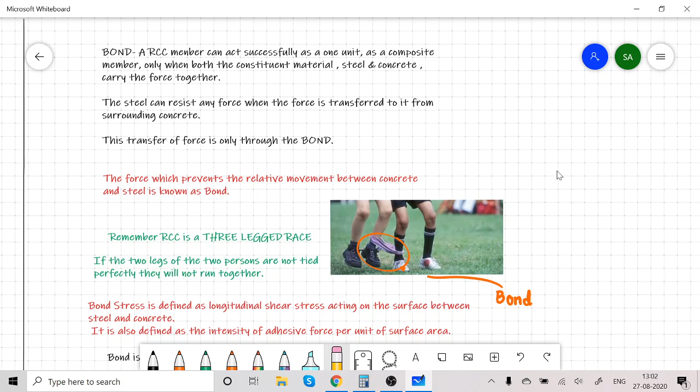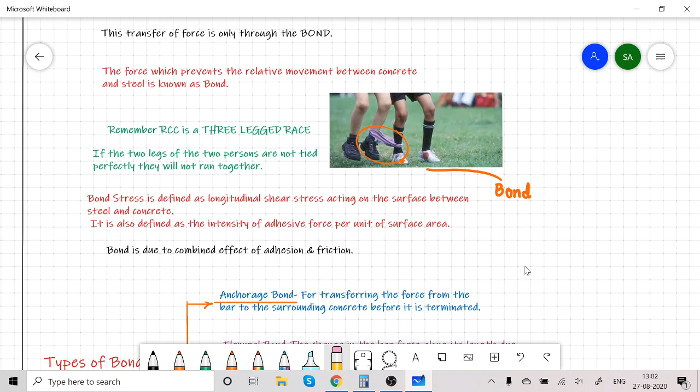Bond stress is defined as a longitudinal shear stress acting on the surface between steel and concrete. Bond stress is also defined as the intensity of adhesive force per unit of surface area. Bond is due to combined effect of adhesion and friction.

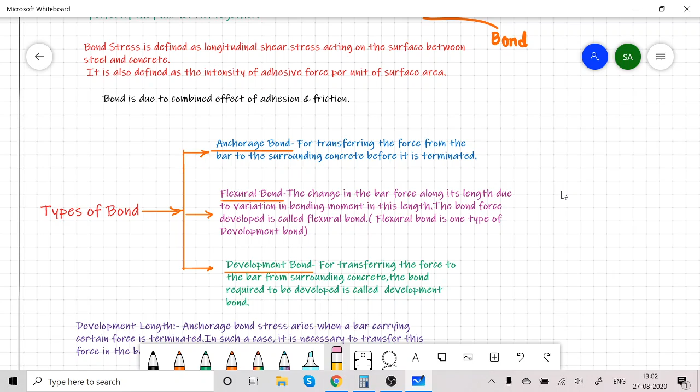Now there are three different types of bond. Anchorage bond is for transferring the force from the bar to the surrounding concrete before it is terminated, that is anchorage bond. Then flexural bond: the change in the bar force along its length due to variation in bending moment in this length, the bond force developed is called flexural bond.

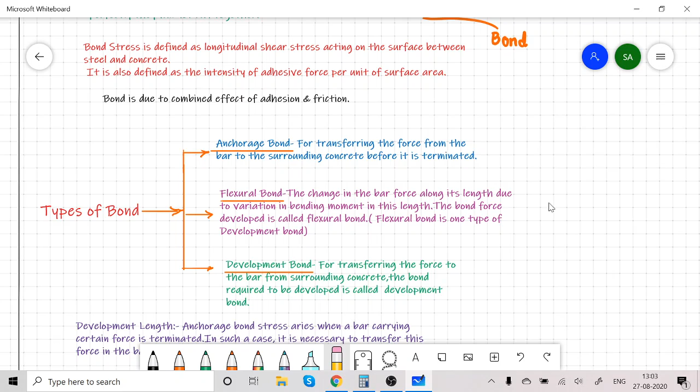Flexural bond is one type of development bond. And the third type is development bond. For transferring the force to the bar from surrounding concrete, the bond required to be developed is called development bond.

Now let us see what is development length. Anchorage bond stress arises when a bar carrying certain force is terminated. In such a case, it is necessary to transfer this force in the bar to the surrounding concrete over a certain length. The length of the bar LD required to transfer the force in the bar to the surrounding concrete through bond is called anchorage length.

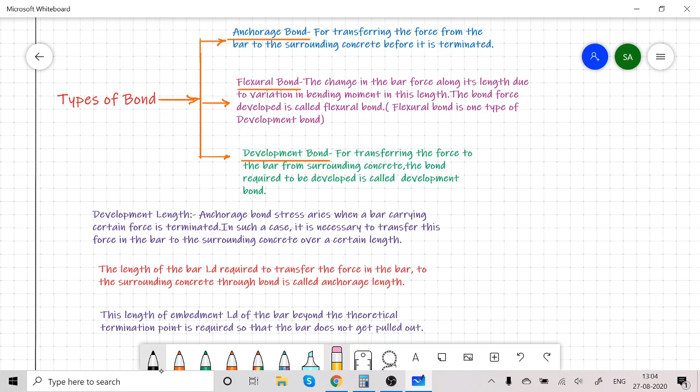The length of embedment LD of the bar beyond the theoretical termination point is required so that the bar does not get pulled out. For example, consider a cantilever beam

or a cantilever slab. This is a cantilever slab, and to resist tension, as there is a hogging bending moment, tension will be at the top. So main steel is provided at the top.

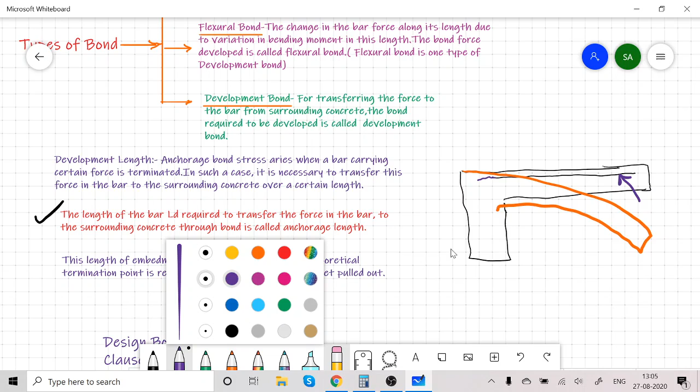Now if you provide the bar up to this point only, what will happen? There is a possibility of the bar getting pulled out due to this hogging bending moment. This bar will get pulled out, and to avoid this, one should embed this top bar, which is under tension, to a sufficient length so that it will not get pulled out.

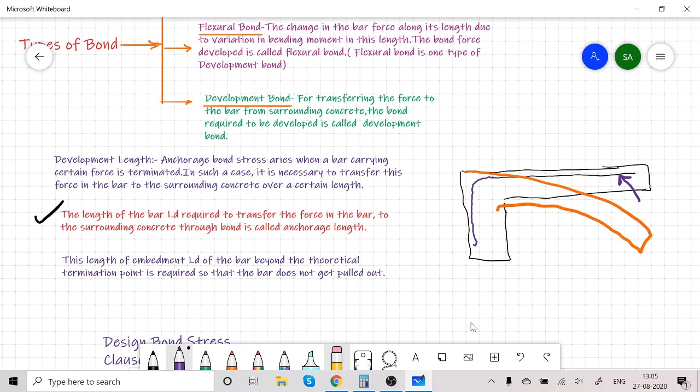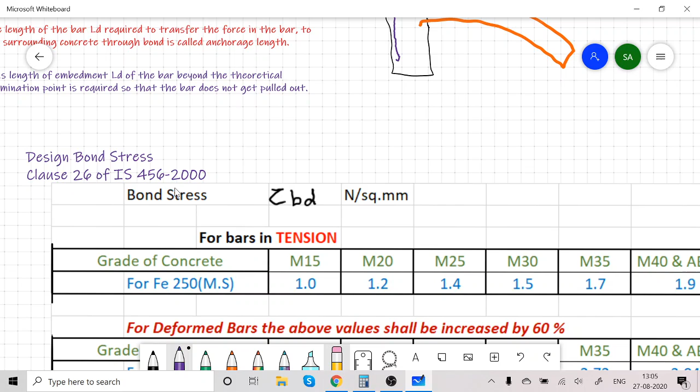So how the development length is calculated, we will see here. Before that, the bond stress depends upon grade of concrete. The design bond stress is given in clause 26 of IS 456/2000. It is denoted by tau BD, design bond stress, measured in Newton per square millimeter.

For bars under tension, for grade of concrete, this table is for Fe 250, that is mild steel. M15, M20, M25, M30, M35, M40 and above, and corresponding tau BD values are given in Newton per square millimeter.

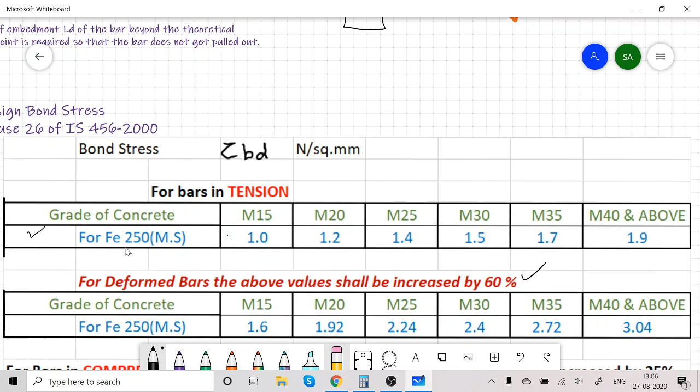Remember, this is for mild steel. For deformed bars, that is for torch steel, Fe415 or Fe500, these values given in this table are to be increased by 60%. So after increasing these values by 60%, these values are for torch steel, deformed bars.

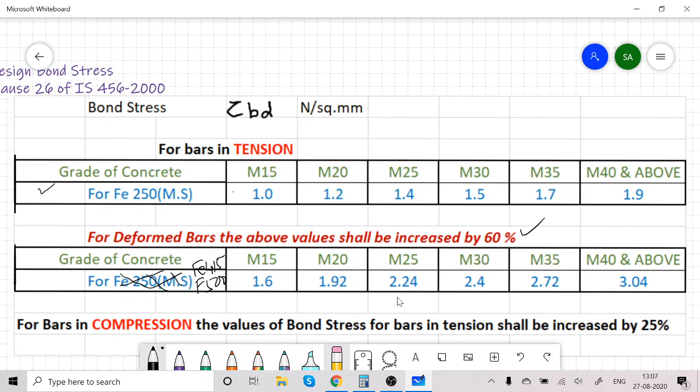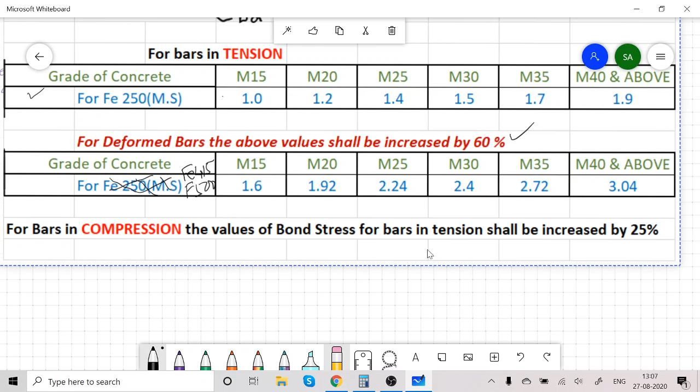Now, if the bars are under compression, the values of bond stress in the bar shall be increased by 25%. So, if the bar is in compression, the value of bond stress is increased by 25%.

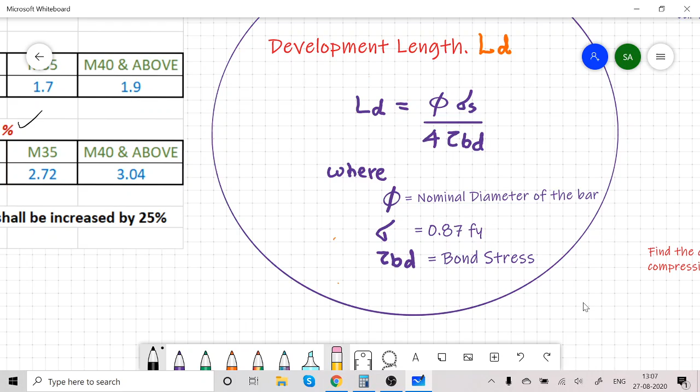Now, how to calculate the development length LD? LD is equal to phi into sigma, divided by 4 tau BD, where phi is nominal diameter of the bar, sigma is 0.87 Fy, and tau BD is the bond stress given in clause number 26 of the IS 456-2000 code.

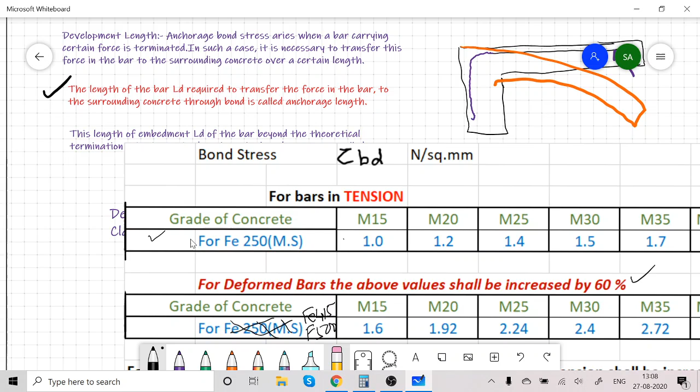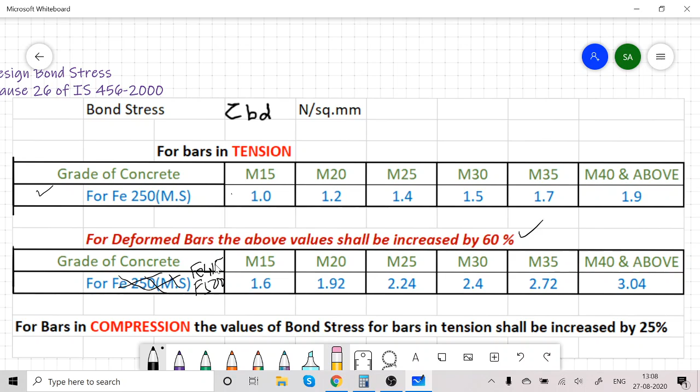This table gives us the value of tau BD. Remember, this table is for bars in tension for mild steel, and this table is for bars in tension for torch steel, that is Fe415 and Fe500, and if the bars are under compression, increase the values by 25%.

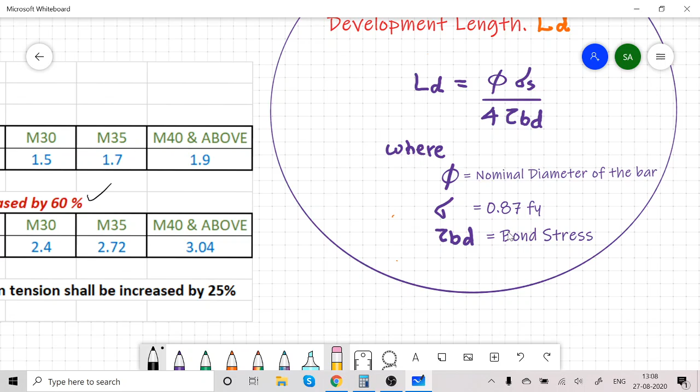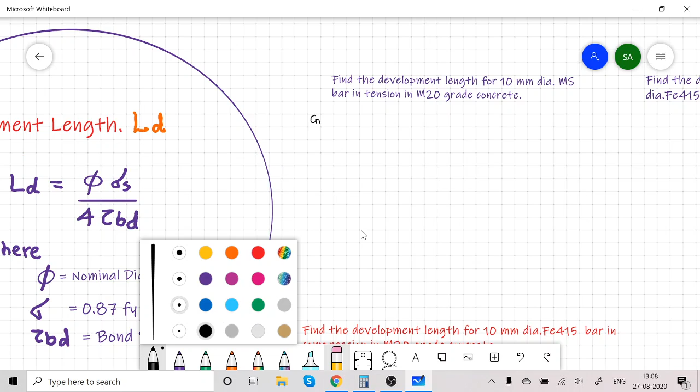Now let us consider one example: find the development length, LD, for a 10 mm diameter bar, which is mild steel, Fe250, in tension, with grade of concrete M20. Solution: as we know, LD is equal to phi into sigma s divided by 4 tau BD.

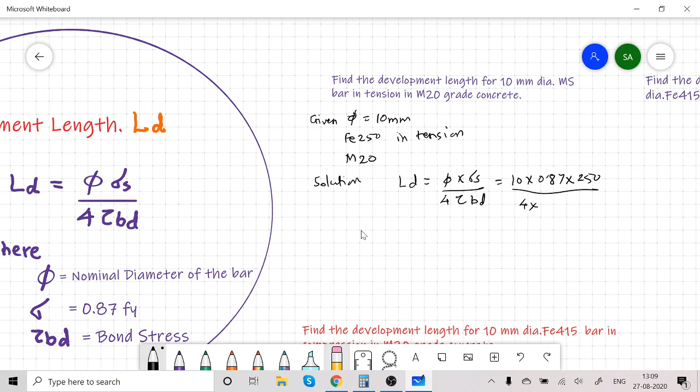Phi in this case is 10 mm. This is 0.87 Fy, 250, divided by 4 into tau BD. Tau BD for M20 grade concrete is 1.2, for bars in tension, and this is for mild steel. After simplifying this, LD is equal to 453.125 mm.

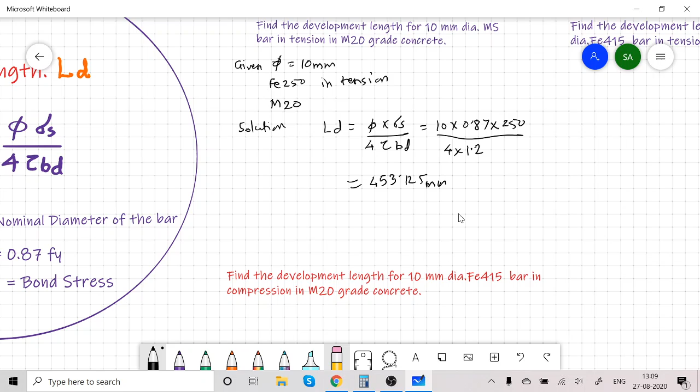Now let us consider second problem. Find the development length for 10 mm diameter bar, Fe415, so it is Tor steel, bar in tension, M20 grade concrete. For M20, for bar in tension, tau BD value is 1.2, but this is for mild steel.

For Tor steel, we must increase this value by 60%. So LD equals the same formula, phi into sigma s upon 4 tau BD. Phi is 10, 0.87 Fy is now 415, divided by 4 into 1.2 multiplied by 1.6, because Tor steel has a rough surface so friction is more, so we increase the bond stress by 60%. That gives 470.1 mm.

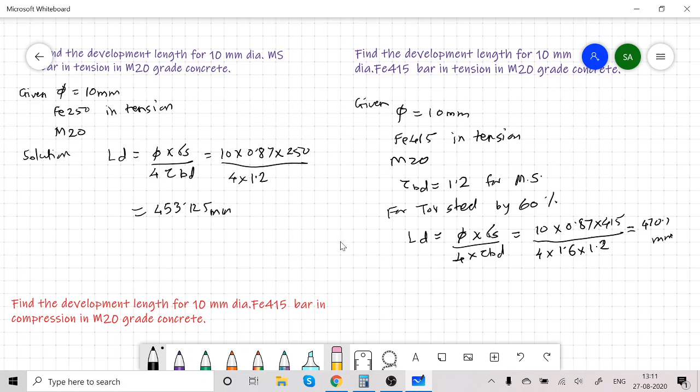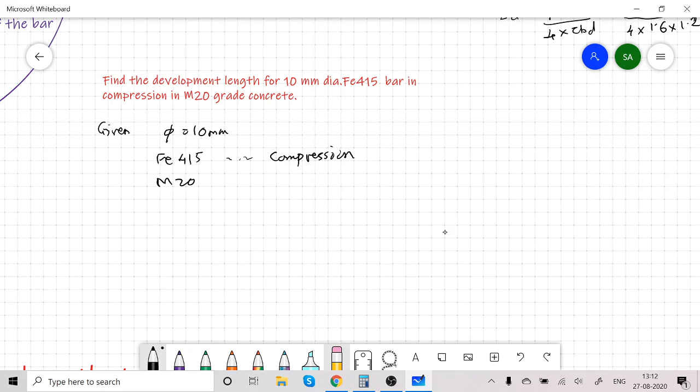Now consider the third case. Given: diameter 10 mm, Fe415, M20, but this bar is under compression. For compression, we must increase the bond stress by 25%. For M20, tau BD we know is 1.2 Newton per mm square.

Increase by 60% for Tor steel: 60% of 1.2 means 0.72. And increase by 25% for bar in compression: 25% of 1.2, that is 0.3. So this 0.72 is 60% of 1.2, and this 0.3 is 25% of 1.2.

So total, what do we get? 2.22 Newton per mm square tau BD value, and therefore LD equal to phi into sigma s divided by 4 into tau BD. Phi is 10 into 0.87 Fy divided by 4 into 2.22, this being the corrected bond stress considering it is Tor steel under compression. So LD we get is 406.5 mm. Likewise we can calculate the value of LD.

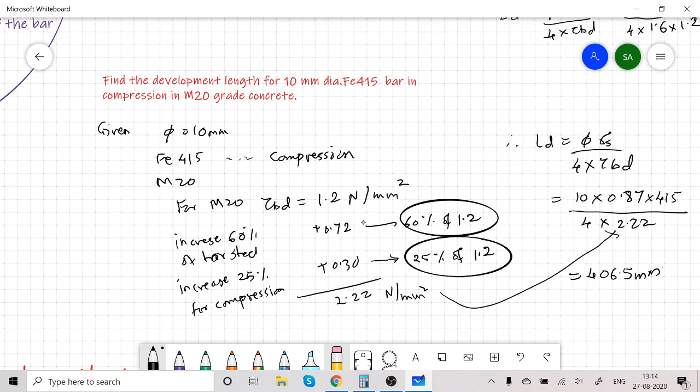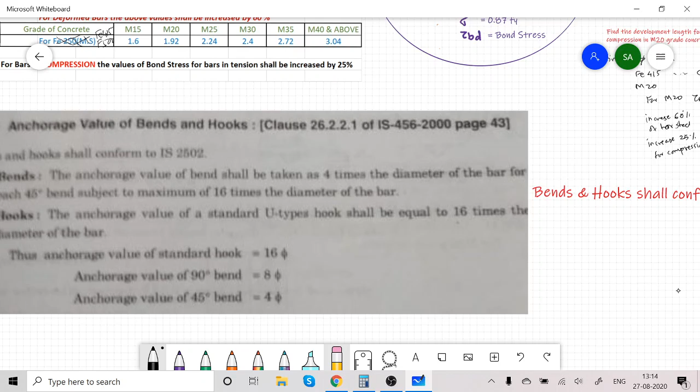Now this completes the small chapter on bond. Further, we will see the anchorage value of bends and hooks. This is given in clause 26.2.2.1 of IS 456. The bends and hooks shall conform to IS 2502. For bends, the anchorage value of bend shall be taken as 4 times the diameter of the bar for each 45-degree bend, subject to a maximum of 16 times the diameter of the bar. For example, if the bar is bent at an angle of 45 degrees,

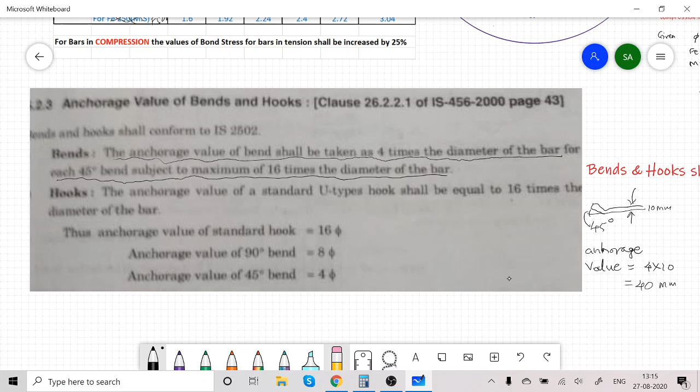and if the diameter of the bar is say 10 mm, then its anchorage value is equal to 4 times diameter of the bar, that is in this case 40 mm. So for each 45-degree bend you consider 4 times the diameter of the bar. If the bend or hook is 90-degree, same 10 mm diameter bar, then anchorage value is equal to 8 into diameter of the bar, that is 80 mm.

4 times for each 45-degree bend. Here total is 90 degrees, so 45 and 45, meaning 4 and 4, so 8 times diameter of the bar. This is limited to a maximum of 16 times diameter of the bar. So at most you can bend like this to 180 degrees, in this case 45, 45, 45, 45 - 4 times 45 means 16 times diameter of the bar in this case.

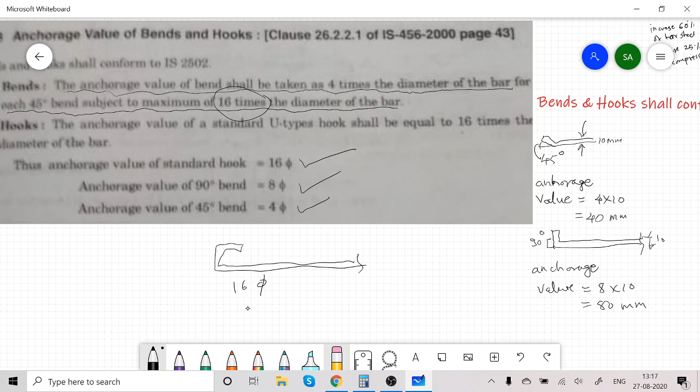This is the anchorage value of a standard hook. For a 45-degree bend, it is 4 into diameter of the bar. For a 90-degree bend, it is 8 into diameter of the bar. Maximum 16 into diameter of the bar can be considered as the anchorage value. This completes the bond chapter. Thank you.